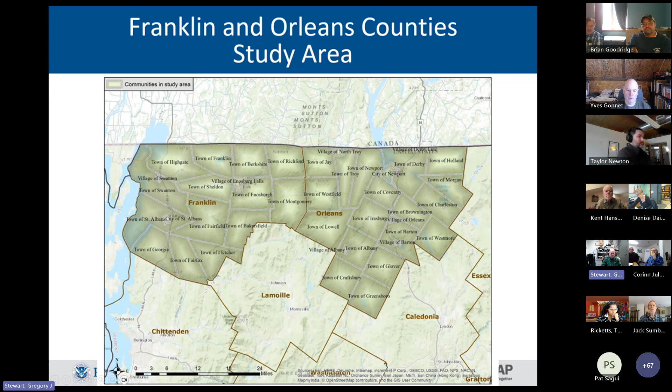So let's talk about the different study areas and what was done where. So obviously Franklin, Orleans County, if your towns were in here, you got a map update. So all of the communities within both counties were completely updated. So giving you some stats about the area: 1,400 square miles, population in 2010 was 75,000. A number of different watersheds go in and out and touch the edges, so it's really tough to calculate what the totals are. So we've got some percentages so you have a different idea of the different reaches.

3,905 catalog river miles. So obviously that does not mean these are all done with brand new detailed studies. I'll get into that a little later, but I just want to give you a sense that 3,905 miles is a lot of river miles, and 971 miles of those reaches are actually named. So there's a lot of reaches where it might be an unnamed brook or some small reach.

So some stats about the Lake Champlain watershed: 44 different communities, all in Vermont, almost 2,800 square miles, population of 204,000, and 6,573 catalog miles, and then almost 1,600 named reaches.

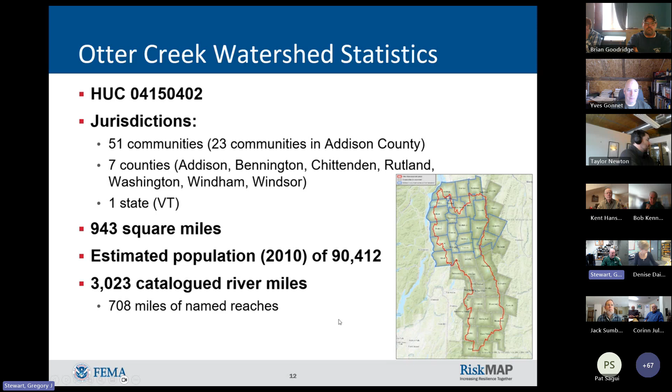Some stats about the Otter Creek watershed. There's 51 communities. Again, we're only updating 23 in this call, but we're working on the southern portion as well. 943 square miles, population of 90,000, and 3,000 catalog river miles with 708 miles of named reaches. So that gives you a little bit of a sense of what we were doing.

Then the assignments we had, specifically what we did, new detailed reaches, and I'm going to go over this in detail, what this means, but revised new detailed studies for the Missisquoi River was all of the Missisquoi River, so 64.5 miles from the mouth of Lake Champlain up to Highgate, Vermont, with the exclusion of the part that goes into Canada. We don't build floodplains for Canada. We just stop it at the border and then continue it when it comes back into the U.S. Lake Champlain had no new reaches studied, no new detailed studies that were done.

So in addition to doing those new detailed studies, there'll also be a DFIRM database. So the database, all of the data underlying will be updated. So when I say things like a detailed Zone AE, it means it has a BFE, it's a detailed study, and what that means is it has surveying, hydrology, hydraulics, and mapping. New detailed study means that all this is new. So we went out, resurveyed all the cross sections, all the structures, the bridges, the dams, the culverts, and open water river cross sections. Then we did brand new hydrology.

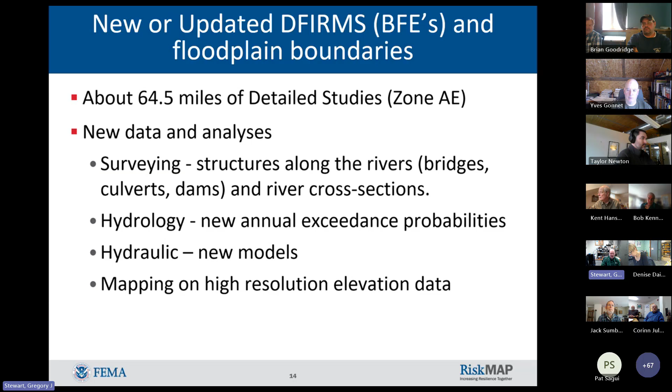Then we put the surveying data into a hydraulic model, entered the hydrology, and ran a brand new hydraulic model. Then that output was mapped against the high resolution elevation data. So speaking of the LiDAR data, the high resolution elevation data, all the mapping was done on LiDAR. The surveying on a detailed study was done with either total station or GPS at an even higher resolution, but all of the mapping is done on the high resolution elevation data collected with LiDAR.

For the hydrology, when we computed the hydrology for the Missisquoi River, there's a number of different locations that we shared what the different values were. So the old hydrology from your effective study for the case of above Jay Branch would be 7,800 CFS, cubic feet per second. We calculated 9,890 CFS. So this is a 27% increase, and this is all taken from the gauge data. So this calculation was done and computed.

It also does include the 2023 July flooding on the Missisquoi River, which wasn't as bad in the Missisquoi as some of the other events like 2011, but it did affect the hydrology slightly. So just so you're kind of aware.

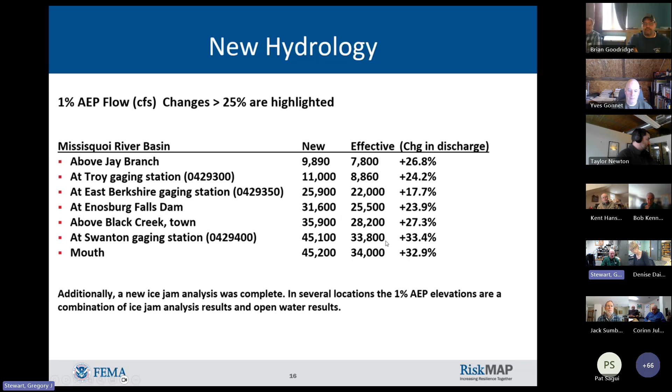Additionally, the open water flooding analysis is not always the controlling or limiting factor in your base flood elevation. So a complete ice jam analysis was done for all of the Missisquoi River and several locations. The 1% annual exceedance probability or 1% elevation was a combination of ice jam results and open water results. So just to let you know that there are some factors beyond just the hydrology change on the Missisquoi River.

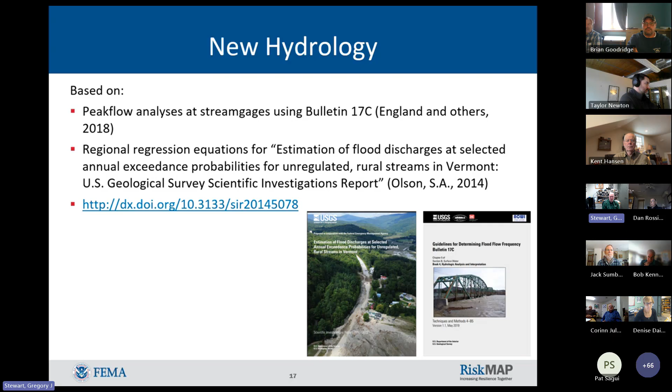So that new hydrology is calculated using peak flow equations from Bulletin 17C, which is what we call the hydrologist Bible of the process. For calculating flow anywhere between the stream flow gauges, we had to use a proration and use the regression equation. The 2014 regression equation was used.

So for the work maps, the maps you're about to see, there's a base map, and this does vary. I'm sorry, this may be complicated for some of you because your maps may not all look the same. I've got examples of both versions of maps, depending on whether your maps were paper maps and you were considered a non-digital county, or whether you had actual digital conversion maps. So most of the images here will be on the digital conversion maps, and then I'll talk about the few of you that had the paper version of the maps and what those look like.

So there's a slight difference, but overall they're all going to be basically the same, in that we take the old map as the background. So whatever your existing effective map is, whatever your maps are right now today, those are the background. So that's what's behind. So when you say, hey, wait a minute, this road is not there anymore, well, those old maps may be 20, 30, or even 40 years old. So it's quite possible.

We will be putting these on new imagery, so they will be on updated maps when you get to the prelim phase. But for the work maps, we want you to look at your old maps versus these new proposed changes. So that's why we plot them up and show them the way they are. So all of the new floodplains are transparent solid colors. You'll see cross sections, baselines. Again, I've got some images showing these. But again, the imagery underneath and the roads are not correct. The old cross-section letters and all of the labels are going to be there so you can see them.

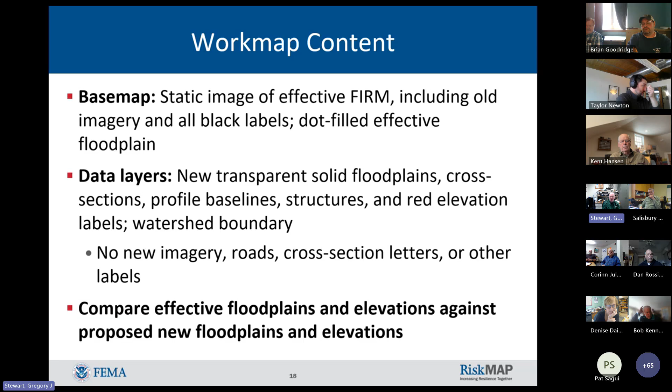So again, the goal of this is for you to compare your current effective maps with these new floodplains with new elevations. We have a lot of people that say, why didn't you put them on the new aerial imagery? We're going to for the preliminary map. But a lot of people know what their effective maps look like. They're really well versed. That's why we're presenting them to the towns. You have all of the local knowledge about what your maps really look like now. So the idea is we put new floodplains on top to show you where they've changed and hopefully to be able to highlight that.

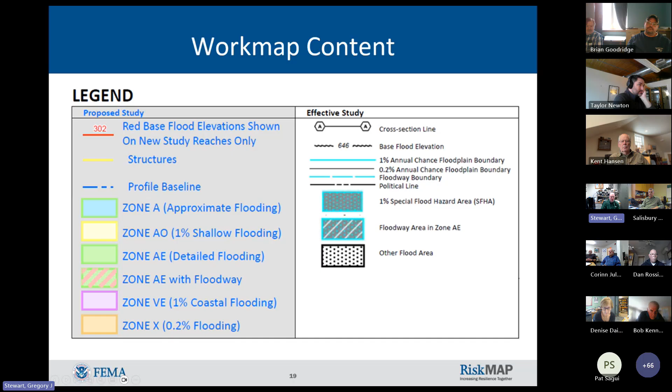Again, effective map is in the background. Floodway down through the middle, and there's old and new floodways. Old floodplain is dotted, the new floodplain is green. So hopefully that makes sense. And the structures are going to be in yellow. The yellow lines will be for structures.

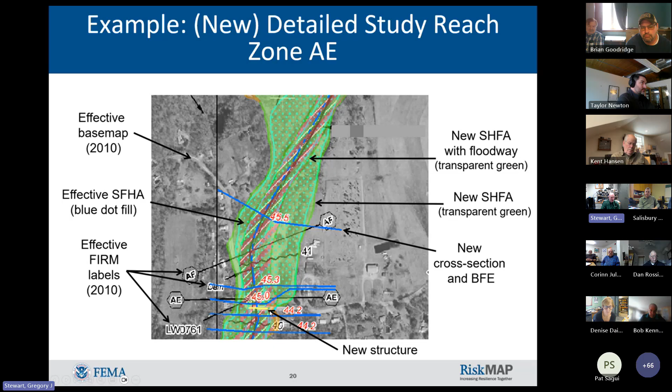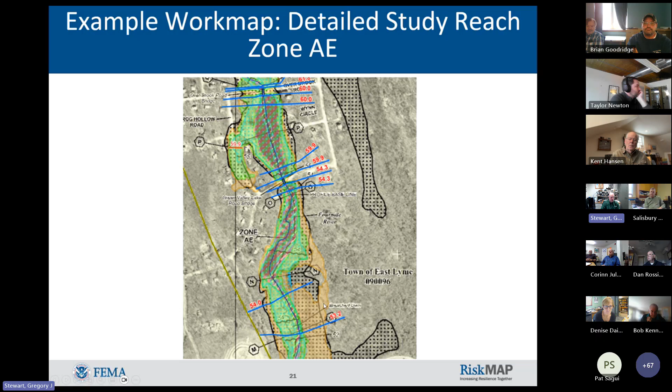What is the difference? This one's even more complicated because the orange you see here is the 500-year. So it's an updated 500-year. So it's the new 500-year floodplain. So again, these can be kind of complicated examples.

So what changed on your map, in addition to detailed mapping, is the zone A's. So all of your zone A's, or approximate zones, all of them, I'm going to say that more than once to make sure you remember that one word, all zone A's are updated, all of them. So all of your old floodplains, they're not thrown away, they're just set off to the side for a minute, and we develop all new floodplains. Brand new.

So we use what's called base level engineering. So we did this by using some approximate methods. So no surveying is actually done. So structures are not considered. They're not a factor in this. But new hydrology is calculated. The new hydraulic models are built, and then those results are then mapped. Everything is mapped on the LiDAR data.

But again, just to emphasize that these are all new. So it's brand new engineering behind all of these. So again, we do bring up the old ones and do a comparison and try to see if there were any errors or mistakes. But the bottom line is these are new.

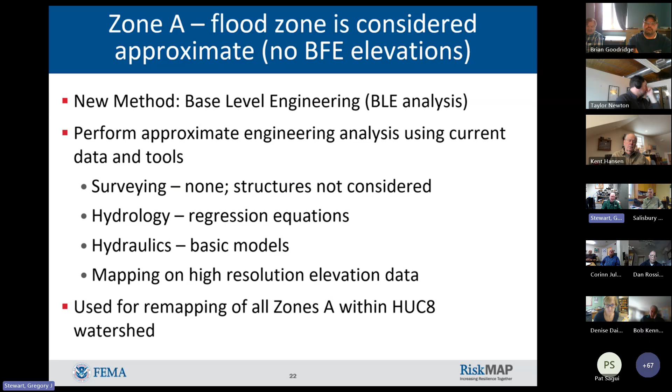So again, all Zone A reaches. Zone A's do not have BFEs. There's no base flood elevation published on them. The only defining feature is the line itself. Okay, so that's just to make sure to be clear about that. And they are all new. So just trying to make sure that everybody remembers that piece.

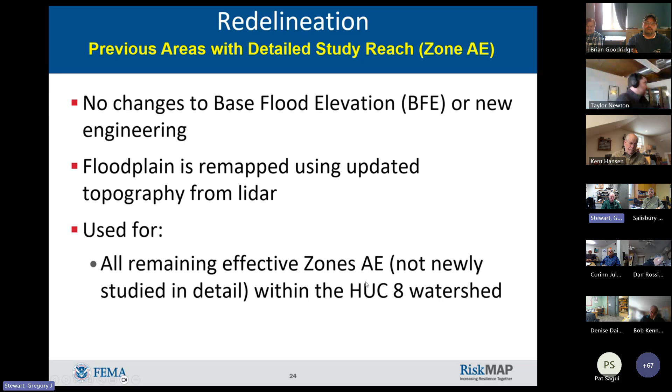So I'm going back to detailed studies for a minute. Now, what is a redelineation? Well, this is where we didn't update the engineering. So we didn't change any of the base flood elevations. Nothing. We did remap the floodplain based on the LiDAR data. So we redrew everything, but we didn't change any of the base flood elevations. So all of the remaining effective Zone AEs, the elevations all stayed the same, but the floodplain boundary, the floodplain would actually be adjusted and moved.

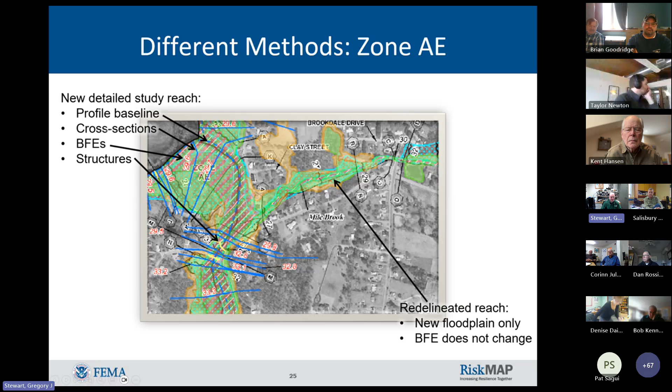So I'm just going to go over this one more time. There's 3 different types of mapping. There's the Zone AE new detailed reach. The Missisquoi River was the big one in this study. New surveying, new hydraulic model with new hydrology plugged in. And then all of that is mapped with those blue lines and the red numbers with very clear new locations of everything. Redelineated reaches: no new engineering, no new cross sections, just remapped on new topography. So all the BFEs stay the same on those reaches.

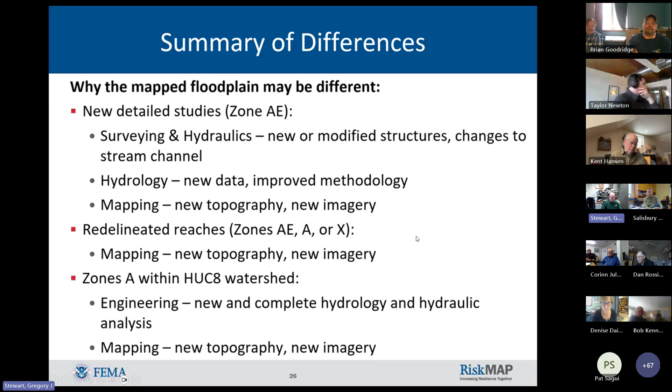Then there's the Zone A's, again, all new. So new engineering, new hydrology and hydraulic models, new mapping. So all new. So things not changed: Zone VEs, coastal doesn't impact you guys. But also, sometimes if the floodplain didn't change, there's some issues with neighboring panels. So if there were no changes to the floodplain or there was no floodplain on a panel, we're not going to update that panel. So that can be a little bit strange at times, if you get into it.

And all features outside the watershed boundary were not changed as well, except if the floodplain did actually go over a watershed boundary. So again, the watershed boundary, we put them on there as pink so they would stand out. So just think of one side of it is within the watershed of study, one side was outside.

So a total of 354 panels were updated in Addison County, Chittenden. Those are just the numbers. So you can take a look at how many panels were updated in all of the different counties. And everything is going to get published by county. So it's not by town, it's by county now. So all the towns, all the counties will be updated entirely, or at least the panels that touch the watershed. Like Otter, I showed you Addison County, we're doing almost all the panels in Addison County, but there's a whole other piece that's going to be going later. So go back to what I said earlier about the reach boundaries as the limits.

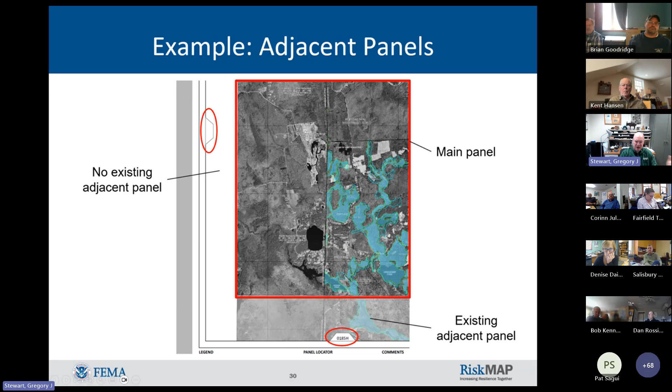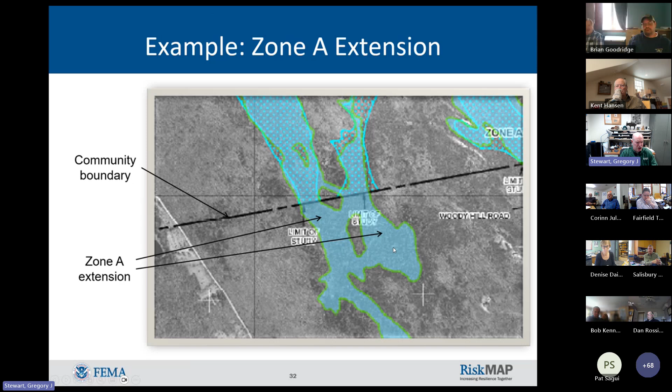Just an example of the Zone A extension where, again, the floodplain you can see used to stop at the community boundary, which makes no hydrology sense. The floodplain just shouldn't stop like that. So now you'll see the new one, again, the dotted is the old and the shaded is the new. So the new one will extend into the new study.

So send any comments to me and also include Melissa, please, and CC Colleen Bailey, who's our primary FEMA contact. If you have comments, we'll be reaching out with an email to confirm if you attended this meeting and we've got your contact info. Just to let you know, you don't have to have comments, but if you do, again, you've got all the local knowledge. We're trying to tap into that and see if there's anything you have concerns about before we move forward with the preliminary phase of the project.

This will be on our SharePoint site. The hope is that we can get these up on the map service center, but I know there's been problems with getting work maps posted there. So it's likely we'll have to pull them from our SharePoint site.

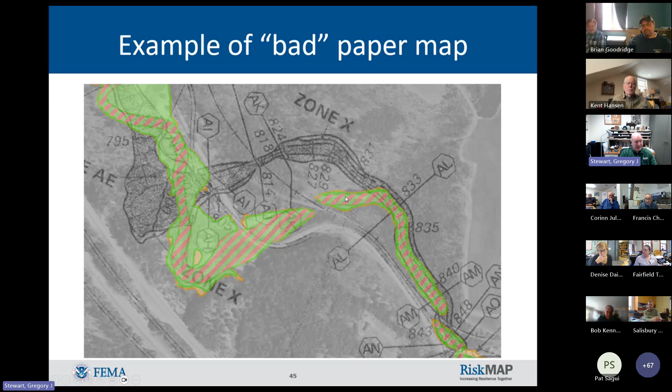So most of the time it's going to work okay for you. Occasionally, if you see those streams not quite in the right spots, that's because those paper products were never georectified quite the same way, so they're not going to align perfectly. There aren't too many of those areas, but there are some, so just be wary of that.

So the last thing I'll go over is our optional breakout sessions. The idea is to provide you an opportunity to review your map, make your comments, and send those back to us. But also, if you have specific questions you want to go over with us, let us know and we'll schedule a breakout session with you. We're not going over this presentation again - that's not the intent. The intent is that you have an opportunity to go over where your issues are. So we usually break them up into one hour blocks. That doesn't mean we have to talk for an hour, it just means we set them as one hour time slots.

So if you've got any interest in doing a breakout, once you've looked at your maps and you're like, hey, this really doesn't make sense to me, I need some clarification, let us know. Give us a few times on the 10th and the 16th that work for you, because we have other people competing for those times and we'll work with it. Melissa's going to be coordinating all of that. And we will have breakout meetings again for specific towns if anybody requests it.